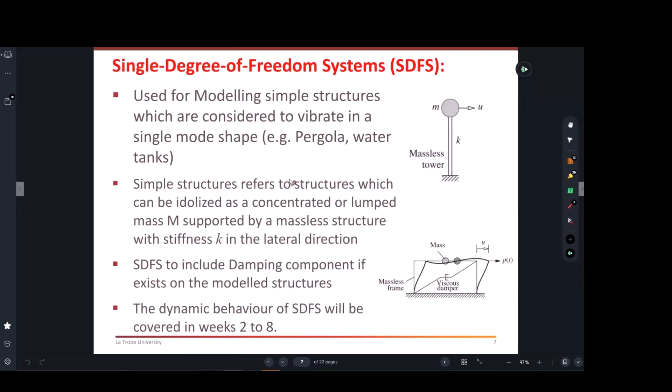So it's going to be spread over a couple of weeks, and then those skills can be expanded over more and more. Just to let you know, don't get confused - where is the multi? Because maybe we go over the weeks and you still don't know when, why we're not talking yet about multi. We're already learning the skills. Then at the end, we're going to show you how you deal with multi-degree of freedom systems. And remember, you're already doing it with your software, but we're going to talk about theories.

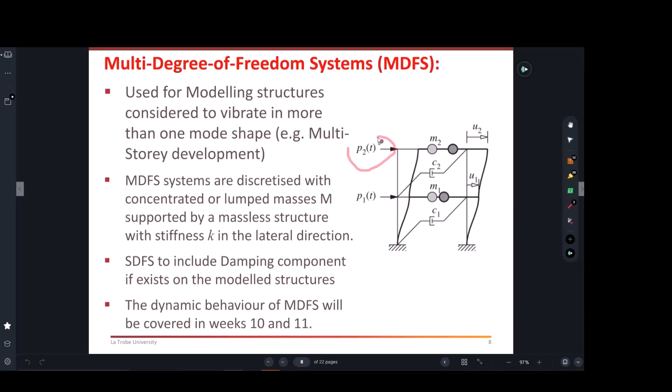So that was one of the main topics we will be talking about in week 3, equation of motion for a single degree of freedom system. When we start talking about free vibrations, we will take you all the way back to the equations of motion, representing the mass, the stiffness, the damping if it exists, the motion, and the external force if there was one. This will help us build skills for the coming weeks, so we can sense the difference between free vibration and forced vibration.

Free vibration, let me talk about it practically. If you have an old existing structure that the council likes keeping, and every year or every 6 months they want to check its situation, or maybe after an earthquake or heavy storm they want to check its health and performance, we do free vibration tests. Engineers connect the structure with a cable and pull it aside, maybe 20 or 30 millimeters, then release it to vibrate. We call this a free vibration system - we pre-disturb the system, then let it freely vibrate.

Some people, when they look at this, say we're talking about earthquake and wind load, so we always have a force. If I go back to this double degree of freedom system, someone will say there is a P - that means external force, like when an earthquake or wind load pushes the building. We call this forced vibration. Especially mechanical engineers, with vehicles and cars and whatever they're studying, always have a force which causes the vibration. In engineering, yes, we do have this happening with earthquakes or wind load, but on the other side, we use free vibration theories where we pre-vibrate things, because it helps us.

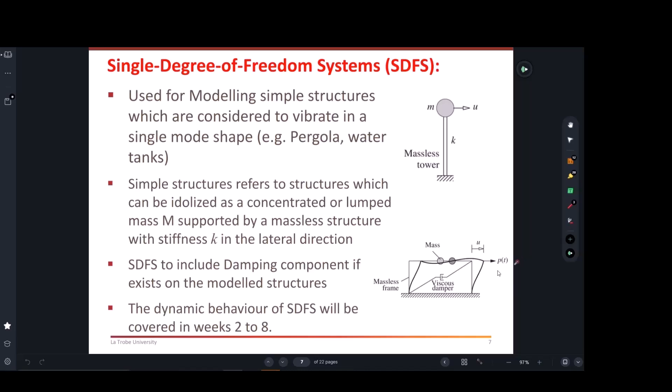Going back to that water tank story, someone will ask why are we doing this - you're going to see this in a few examples. When we pull the water tank and let it vibrate, we measure the displacement versus time. That helps us answer important questions like how stiff the columns of that water tank are, and whether it was damaged. If it's a newly built building, you can work out the stiffness from what you studied at university. But if it's an existing building, maybe there are micro cracks developed from an earthquake, and you can't do it by hand - you have to test it. That's why we use free vibration theories.

So it's taking me to this point in this slide. We do have structures undergoing free vibration. Sometimes people ask why we have free vibration - especially in structural or civil engineering, we have to test things, and when we test things, we have to freely vibrate them. So we just give it a pre-displacement and let it go, and then we study whatever results we get.

Remember, one of the other features of free vibration here is there is no damping. One of the things you need to pay attention to is there is no damping, like it keeps vibrating like this forever, which is not true - you can't have a structure keep vibrating forever. There is always damping, whether internal friction or heat or whatever, that will damp down the vibration.

Yes, I agree with you. You will never have in this world a system that keeps vibrating forever, unless it's a mechanical toy or something made super smooth, like those small toys or statues which keep moving forever. And you can't have this in a building - you won't have this in a building.

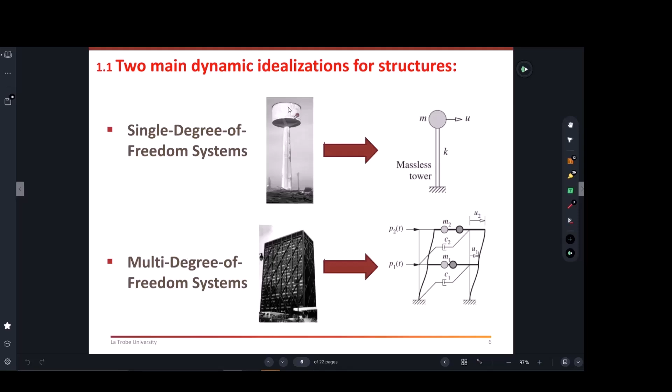So what's the other option is we apply harmonic motion, and we will have a week talking to you about this. There are systems, like vibration generators, where we can attach a system at the top, and that system will cause a vibration. That vibration can be set to be harmonic. Harmonic means it is constant vibration. Let me go back to this topic here.

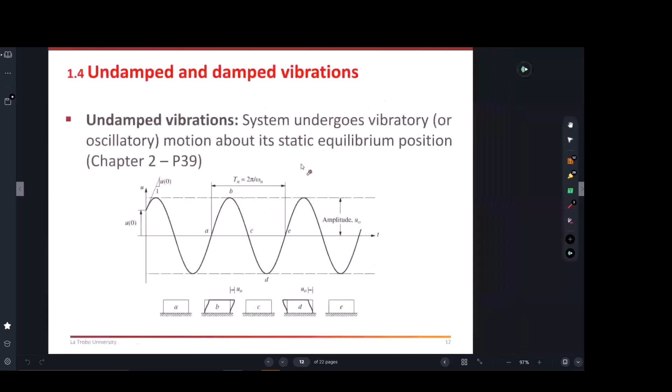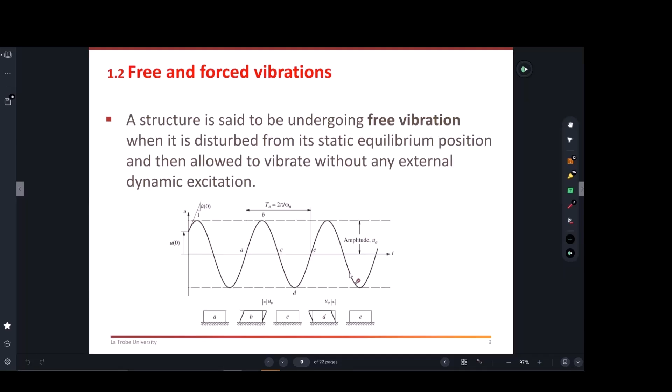Usually all our studies use harmonic, a sine or cosine function. Now, practically how these are generated, we will talk about this - there are special equipment we attach inside the floors, and we let it do this kind of motion. Why are we doing this? We don't want to break the building, and remember, engineers have to be super careful. They don't overkill the buildings - they have to set it in a way where it imposes acceptable vibrations. They can't do it too high, because we don't need to crack the structures. We do it below the acceptable limits.

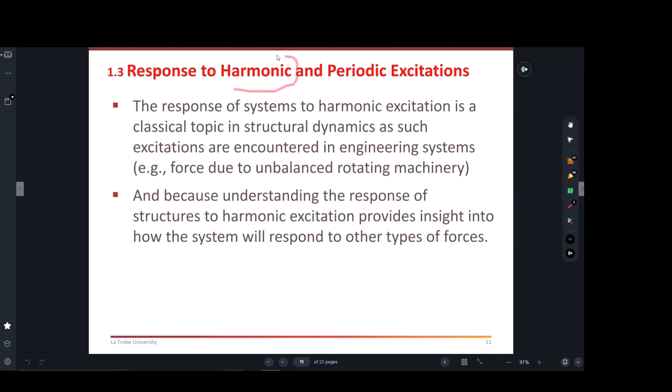So up to this point, I talked to you about the difference between free vibration and forced vibration. I also talked about harmonic motions and periodic motions. Sometimes for buildings we can apply free vibrations, sometimes we can't, so then we use harmonic or periodic excitations. Mostly, or 100%, we're going to be using harmonic.

Now you're going to learn the difference between damped and undamped. Most of you, depending on your course, may not have heavily studied dynamics before. Undamped and damped exist, but in the real world everything is damped, especially in civil engineering, as I said. We're starting by talking about undamped because it will help teach you the basic properties, and it won't be too difficult.

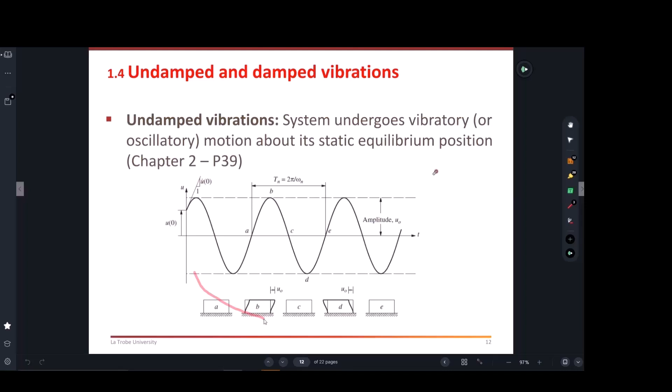So why do we look at undamped systems? Because it helps us understand the dynamic properties. Then we will study and talk about damped vibration, which is the situation we live in in the real world. You don't need to fully master these theories right now - I'm just letting you get ready and see what we're going to go through from week 3 forward.

Obviously the undamped system, which is not real, just goes forever with full amplitude, but this isn't possible - you can't have a system shaking forever, especially in civil engineering. It's going to stop at some stage. As engineers, this subject will teach you how to make sure those amplitudes - displacements, speed, velocity, or acceleration - don't go beyond the limit, because you may break the building. We're going to go through all those theories and see their practical applications.

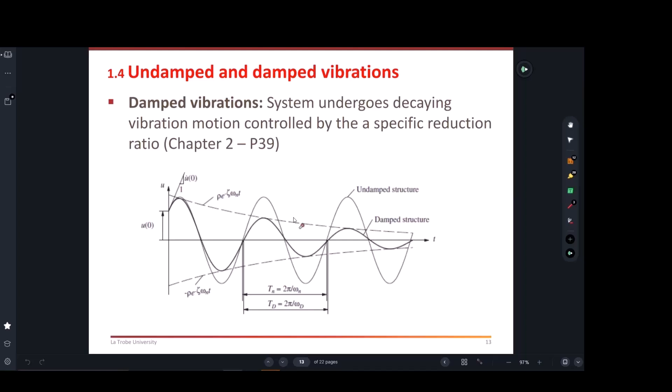Now, how do we measure that? Someone will say this is too complicated to measure - well, that's why we use tests. Tests can give us those figures, and these are the kinds of knowledge and skills you're going to be practicing in this subject. So again, from this slide, I'm simply letting you know there are dynamic systems known as undamped, dynamic systems known as damped, and you will learn more and more about them.

Now, when you know that your system is damped, as I said, in the real world they are all damped. You need to know that there are 3 types of damped systems. One of them is called critically damped, the other one is overdamped, the third one is underdamped.

I think that's enough for you to know today, but over the weeks you're going to know what's happening here. As a quick message, usually what we practice in buildings, this is the situation we're going to be in. Our systems usually shake, and then over time the amplitude gets reduced and goes to 0.

That's what mechanical engineers want to design when a car hits another car. They would like to create a damping system that will suck all the energy, because that's their aim. They don't want to let the cars bounce back and make damage. So usually these systems are not achievable by civil structure engineers, because you cannot do this for buildings.

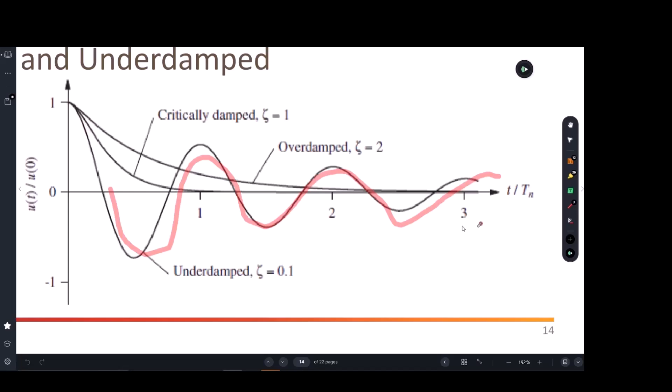Okay, so that's the reason typically in civil engineering, buildings need to vibrate before they get damped. So we're going to go through these skills slowly.

Now, after we finish with damped and undamped, we're going to have a topic talking about pulses, like wind hitting a building or a truck hitting a building, and you're going to see that it depends on the shape of the pulse. We will take you all through that and start seeing.

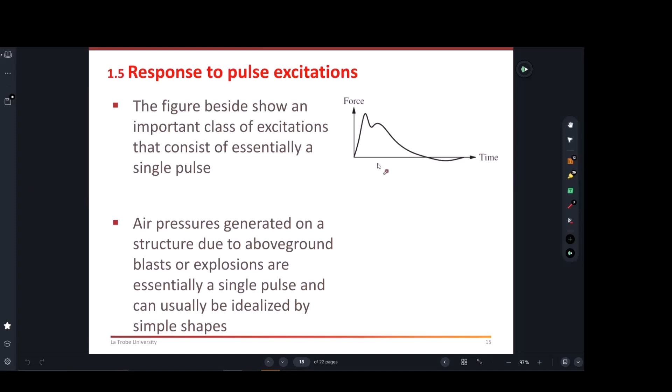You're going to see some of the topics have really very complicated equations. You just don't need to worry a lot because this subject is not meant to teach you or ask for your mathematical skills. I'm just showing you the background, and then we're going to take you all the way to the simplified check or formula to use or approach to use, and that's what you're going to be asked to do, which you'll experience over your worked examples and workshop questions. Okay, which is a good learning curve.

So when we're going to be talking about pulses hitting a building or a structure, we're going to take you through different shapes of pulses, and you're going to distinguish the differences between each and how the building behaves, and what it means if we have a rectangular pulse or half sine pulse or a triangular pulse. You're going to see how the building will respond to each type.

Now, when it comes to the engineer's decision on which one he should use, it really depends on the problem. Are we worried about wind load? Wind can be modeled something like this, because wind, when it comes and hits, it's going to be applied for a few seconds. Remember here that this is the time. And here we're talking about a very small fraction of a second, maybe half a second, maybe 0.7 of a second.

When wind hits a building, it may stay for about 1 second, pushing it. That can be used for modeling wind load on the building or a single degree of freedom system. This can be applied to different cases, like the speed bump situation I'm talking about, which can be more sharp.

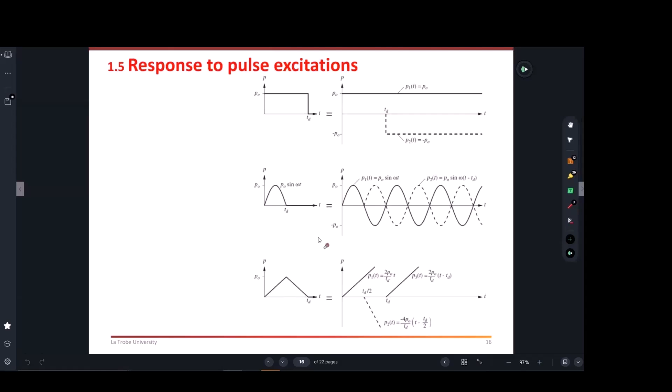Now, after we finish with pulses, we're going to move into something else really important for you to know: non-harmonic motions. I said before that harmonic was something like a sine or cosine curve, but someone will tell me that in reality, earthquakes come randomized, all over the place. Yes, that's totally right.

That's why we're going to study this in one of our weeks. So non-harmonic or periodic motions - we will teach you how engineers deal with these motions and the methods used, remembering our aim is always to find the building response. What does that mean? It's to calculate the displacement the building moved with, or acceleration or velocity - one or a few of them. That's the final question we're always after.

If you hit it with a pulse, what's going to happen? If you hit it with a harmonic, what's going to happen? If you hit it with a free vibration, what's going to happen? That's simply what we're doing.

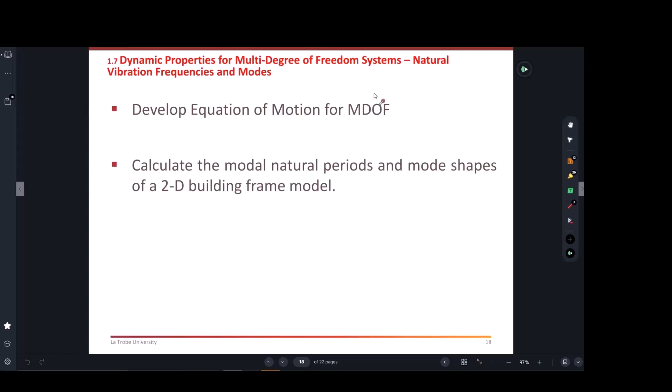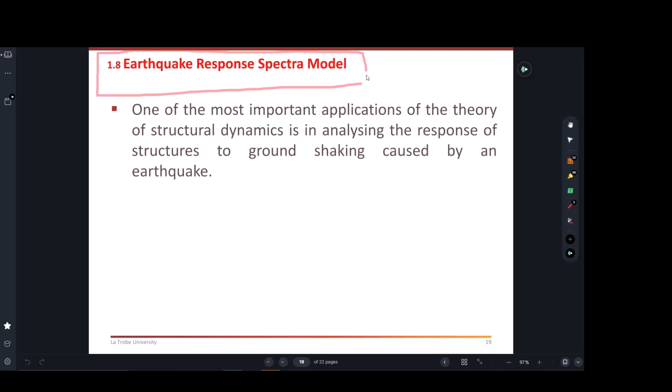So we're going to have weeks 10 and 11 talking about multi-degree of freedom systems and earthquake response spectrum. This is one of the things we're actually going to apply in our second assignment as well.

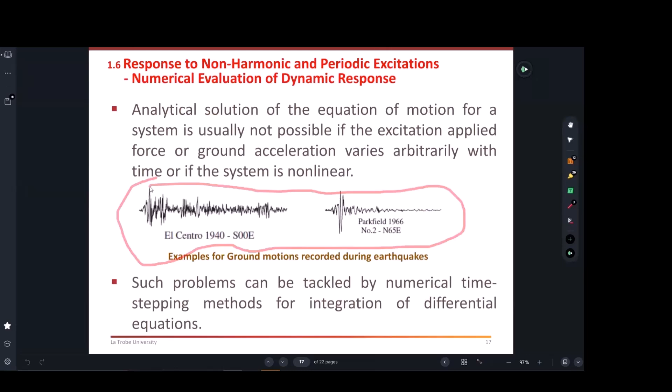Spectrum analysis is kind of summarized in this page, and we're going to slowly talk about this in one of the weeks - this actually happens before we start multi-degree of freedom systems. After I teach you how to deal with and use numerical analysis for those non-harmonic motions, I will show you how to plot what we call spectra, response spectra curves.

It's very, very important - these curves are kind of a guideline for you and other engineers to use to assess buildings, the usefulness of this building. I'm going to end up asking you to plot many of these curves in your second assignment.

You're going to submit almost by the end of the semester. How it's used, simply, using first principles, which we're going to teach you, you'll find the time period of your building. Somehow, you're going to find the natural time period of the building.

If you know this, and if you are worried about an earthquake in Melbourne, the States, or New South Wales, there are spectral curves that I will teach you how to develop for those regions. Once you develop that spectral curve, you can use it. By knowing the natural period, you plot it, say 1.5 for example, and this will give you the anticipated displacement from the excitation.